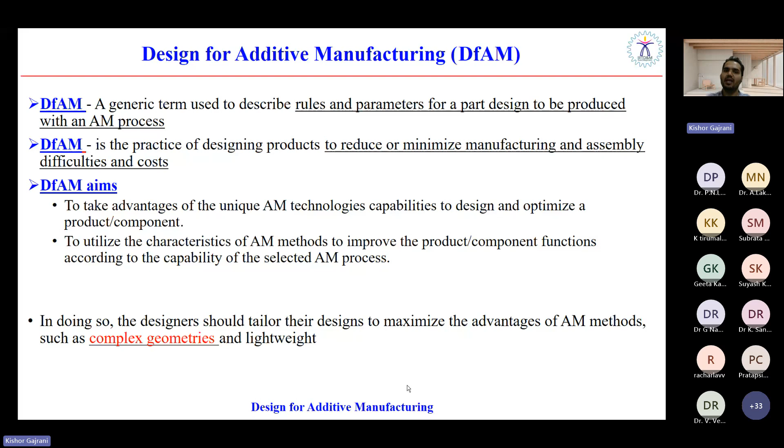So with this aim, we usually design a component. Whenever there is complex geometry, we need to design in an entirely different way. When we have a very simple, common solid object, we usually do not bother that much about the design. Now I would like to show you one specific object, and we will see how that object looks when designed conventionally versus when designed with the help of additive manufacturing. Let's start with an example.

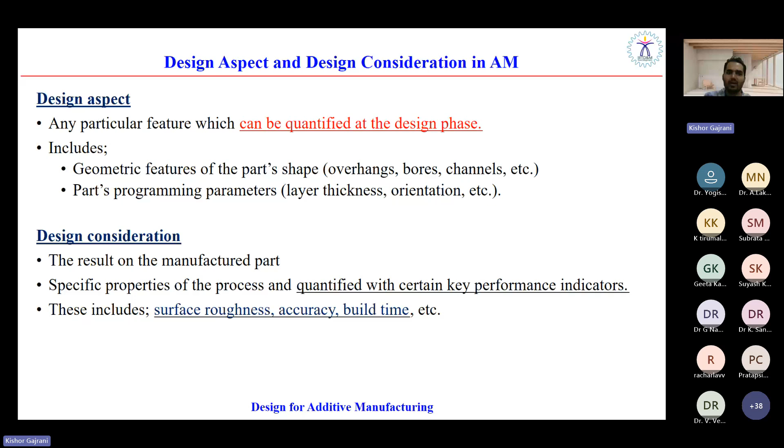Those will come under the category of design aspects and design consideration. Together, if you are taking care of both of these, we call it design for additive manufacturing. Now let's see what features come under design aspects, and what parameters come under design consideration.

Everything we have to think in terms of parts. Whatever part we are fabricating, based on that we think about design aspects and design consideration. For example, certain geometric features are quantifiable: overhang structures are quantifiable, bore or channel dimensions are quantifiable, and if we need a bridge kind of structure, whether one bridge, two bridges, three bridges, and what the dimension of the bridge should be—all those things are quantified.

What is the minimum wall thickness? What is the minimum feature size? I showed you this product earlier—if there's a hole of 2mm, or the smallest hole equals 2mm, I can say the minimum feature size is 2mm. Whether this product needs a support during fabrication, and if so, what kind of support, from which inclination, and what dimensions—all of these are quantifiable and come under geometric features under design aspects.

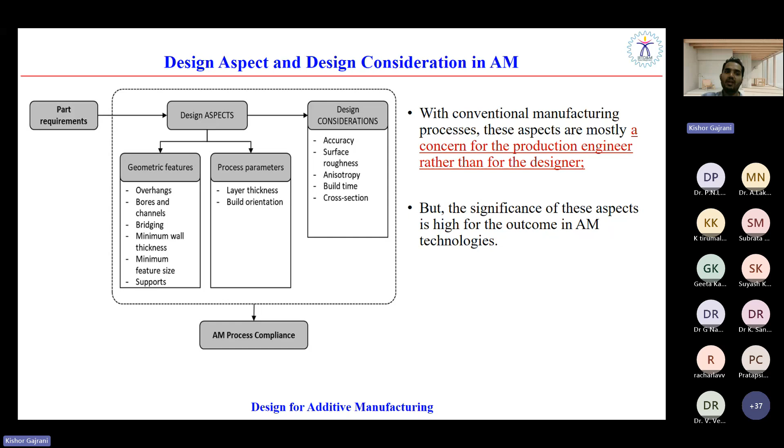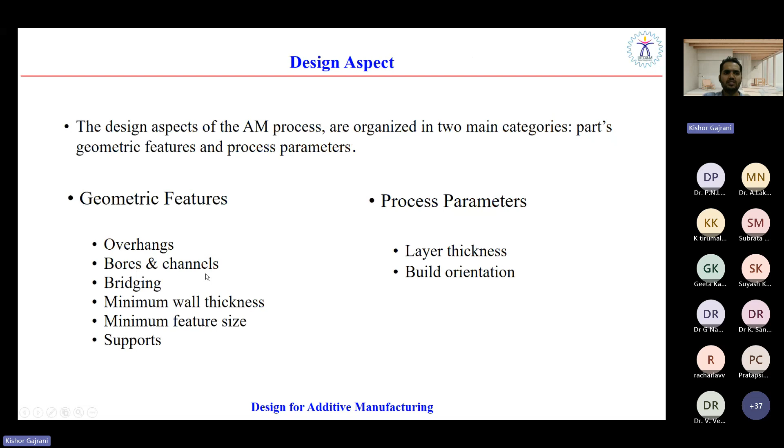Now let's discuss what we have to keep in mind if we have to design an overhang feature. I've put the same slide in the Word document, so I'll skip it here. Let's start with the geometric feature—there are multiple different geometric features, as I already mentioned.

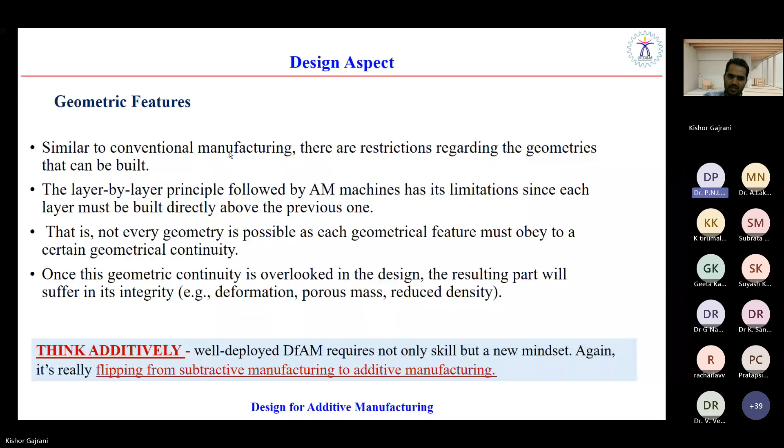Hello sir. Yes madam, maybe there is some technical issue. Sir has left the meeting. Okay, just a minute madam, I'm calling. Hello, now am I audible sir? Yes sir, yes sir, you're audible, thank you so much. Actually there was a lot of rain in this part of Chennai, that's why there was a network issue. Okay sir, no issue. Can anyone please tell me what was the last slide you have seen so that I can continue from that part? Yes sir. Now my slides are visible now.

When we discuss additive manufacturing, we categorize the design part in two ways: design aspect and design consideration. When we can quantify parameters that need to be taken care of during the design part, those come under design aspects—like we can quantify all the geometrical features of the product. For example, how much overhang is required, whether it's 10 degree, 5 degree, 20 degree; what will be the dimension for the bores or channels, the length, the depth—all those things we can quantify. What will be the thickness of the wall, we can quantify. In most cases, we also quantify the layer thickness. Whenever things are quantifiable and we can take care of them during the design phase, we call it a design aspect. But there are equally important things known as design consideration.

Even though we cannot directly quantify those things, we know certain things will affect key parameters like surface roughness. If our layer thickness is small, we get better surface roughness. If thickness is more, we get poorer surface finish. If scanning speed is slow, we get better surface roughness; if scanning speed is high, we get poorer surface roughness.

So even though we are not able to quantify directly, during the design we still know there is a relationship between multiple parameters. To get a product that's more accurate or has a better surface finish, we have to consider those parameters during the design phase.

Now let's see one by one the different design phases I'd like to show you, starting with geometric features. Whenever we build a product with conventional manufacturing, we follow certain design laws based on the failure criteria and the geometries we want to build. Similarly, with additive manufacturing, we have an entirely different set of design challenges. Depending on the type of machine you're using, the layer thickness or the minimum and best resolution of layer thickness changes, and the best resolution of minimum feature size also changes.

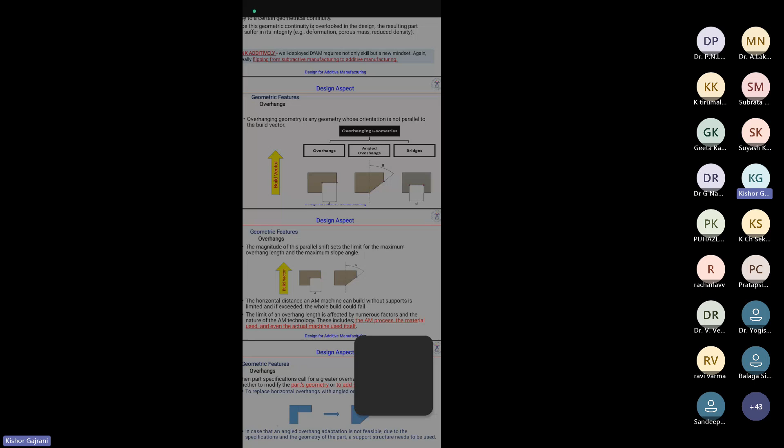And if you look at the bridges, there is a distance between two vertical components shown as D. Depending on the length of D, if it's very small compared to the vertical component, we can easily support it because the beam will act as a simply supported beam. But if D is too high, then we can expect an overhang, or buckling of the bridge, in which case we need to provide a support. So these are the important things we have to consider.

Now, what are the solutions if we have challenges like this? If you look at slide number 11, I am just zooming in on the slide.

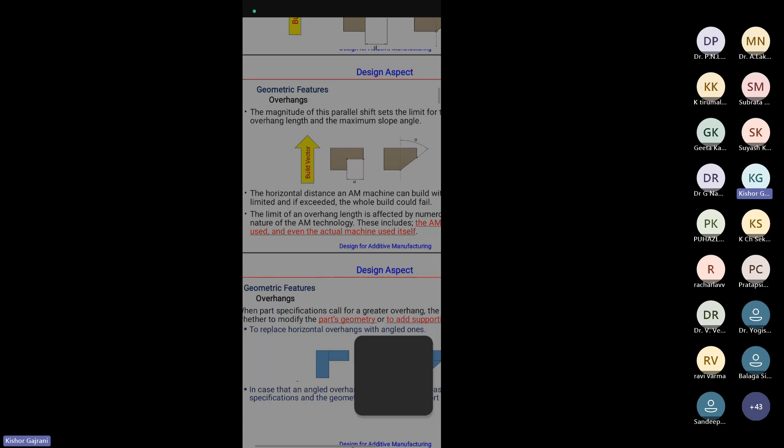If you will see, depending on the size of the parallel shift, we have to consider the limit. For example, with FDM, we can set a limit depending on the size of the vertical component, so that we can print up to 7mm of overhang without support. If we need to print more than 7mm, we definitely need a support structure, or otherwise we have to change the design so that our product should not fail.

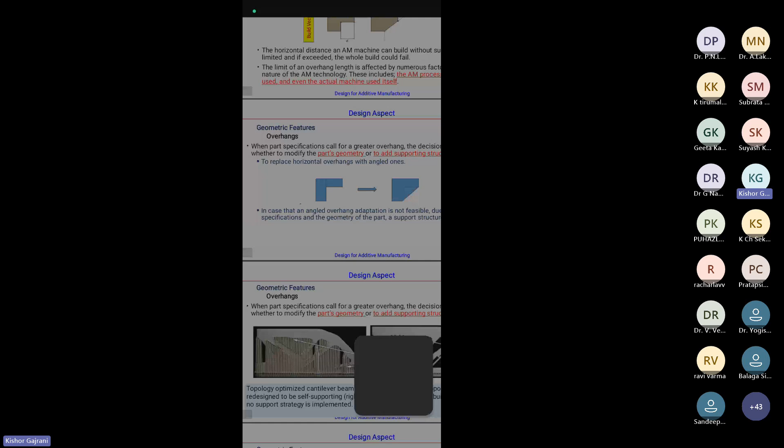So I am showing you another example of an added structure. Now we are on slide number 12. Same vertical component, on top it's a horizontal part. But because the horizontal overhang was too high, it is supported on the right side by a small triangular component. Even though the triangle component will be removed after printing, during printing you cannot print directly on air, so it is very important to avoid failure by providing this kind of support. Whether to provide this support or to allow printing with overhang is decided during the design phase.

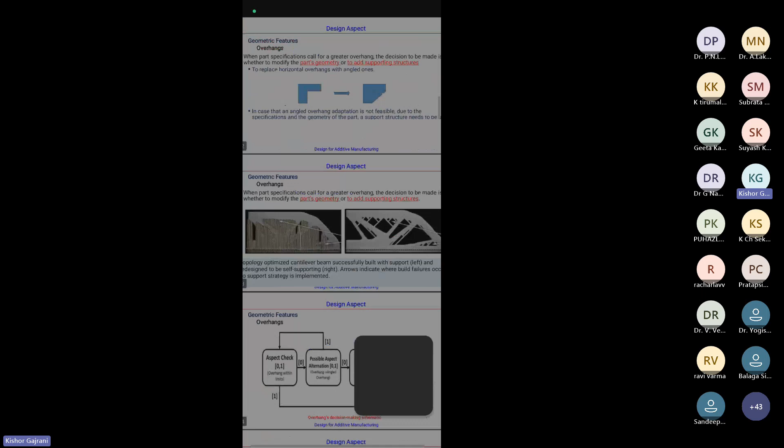Now if you will see the next slide, there's one specific example. On the left side, there are multiple small vertical lines in that component. This is a topology optimized beam. In this beam, just to print it and avoid failure, they have provided multiple different support structures. During testing, they found out where there is a possibility that this structure will fail, and you can see the arrow marks.

During post-processing, before using this component, we will remove all the support structures. These support structures are only to provide load bearing and printable space with additive manufacturing. So when this component is being used, they identified from which area it is failing, and they have put the arrow marks there.

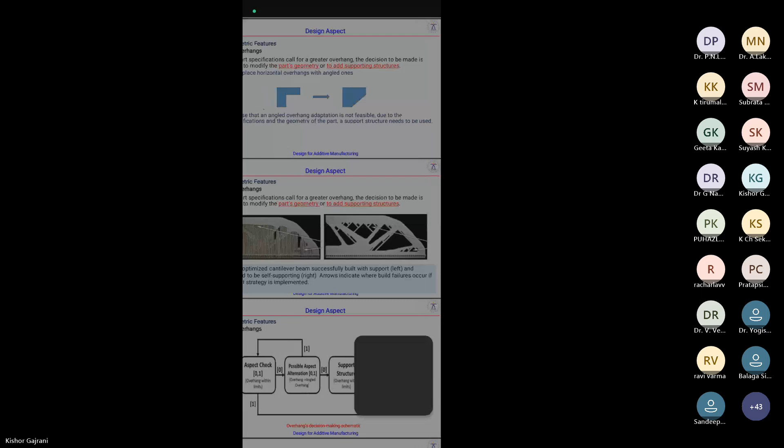During the next phase of design, they changed it. If you will see the second part, this similar kind of structure has higher load bearing. Zooming into this area, you can see the arrow. Previously this part was getting failed when the load was applied, but the same part is redesigned, and now there are multiple different solid layers. Because of this, the rigidity of the entire structure has increased.

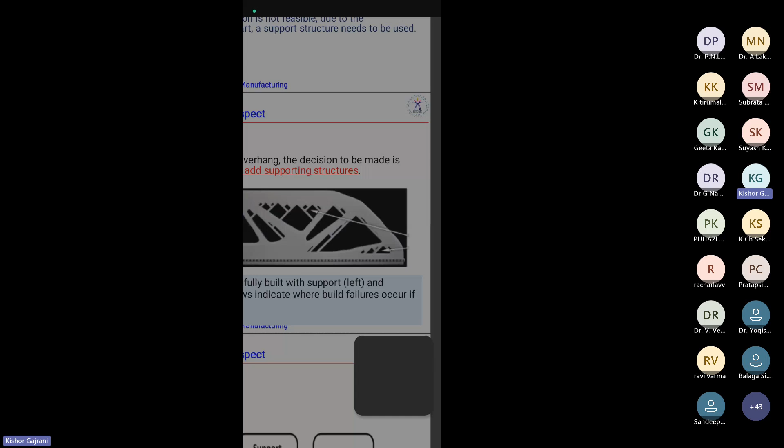Similarly, going back to the top part, the top arrow which has failed - on the right side they have redesigned it, and during the redesigning they have changed the entire type of design. That new design, because of the additional support, gives more rigidity that will help withstand the entire load of the component.

So this is one aspect of the design where we talk about overhang. Once the overhang has been designed, whatever overhang limit you have set is based on the printer. Let's say we have an FDM printer printing the material PLA. For a horizontal block of a given dimension, maybe 20 centimeters, based on that we can print a vertical block with overhang up to 7 centimeters.

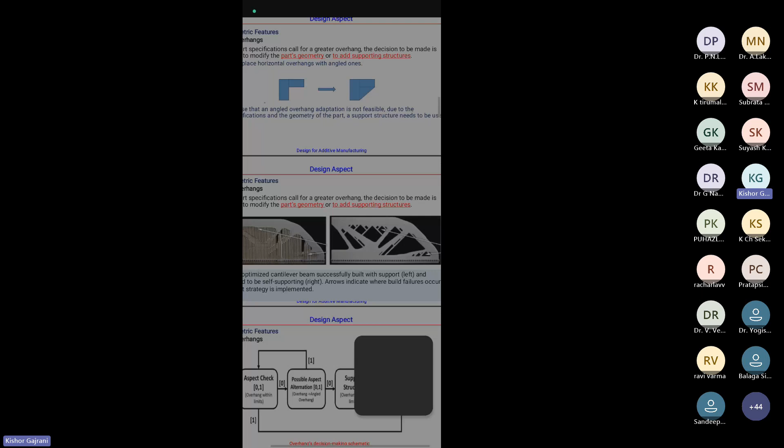Once we have designed that 7 centimeter overhang with the help of all the design aspects, we have to test whether that particular component is going to bear all the load or it will fail during loading, and whether the design needs change or the same design is passed. Depending on the size of the geometric features of the overhang, we check this aspect. If it's passed, we proceed directly. If not, we provide a possible alternative design, and this loop continues till we decide whether a support structure is needed, or we can directly go with the overhang and proceed.

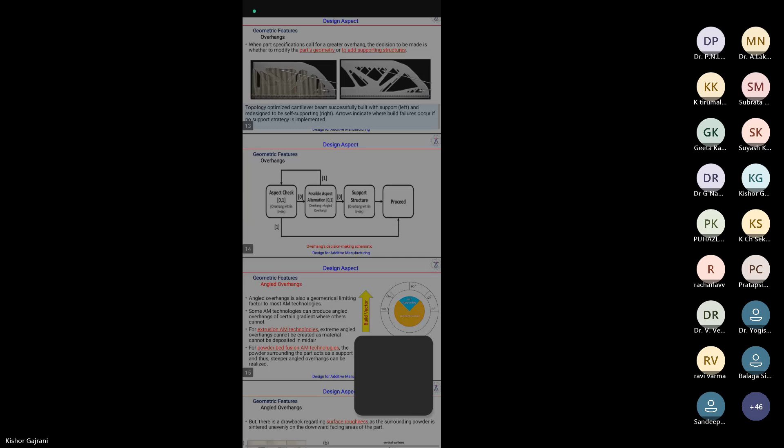So this was about our normal overhang structures. In some cases, we also have an angled overhang. We have initially seen 3 different kinds of overhang - the second one was the angle overhang. When we go with printing, particularly with angled overhang, plus 45 and minus 45 degree overhangs are comparatively easily possible in most extrusion-based additive manufacturing techniques.

Even in powder bed fusion additive technology, support structures are possible even with steeper angles. But if we have to move beyond plus 45 and minus 45 degrees, the situation becomes more tricky. Let me show you the next slide. If you see slide number 16, I'm zooming into that part.

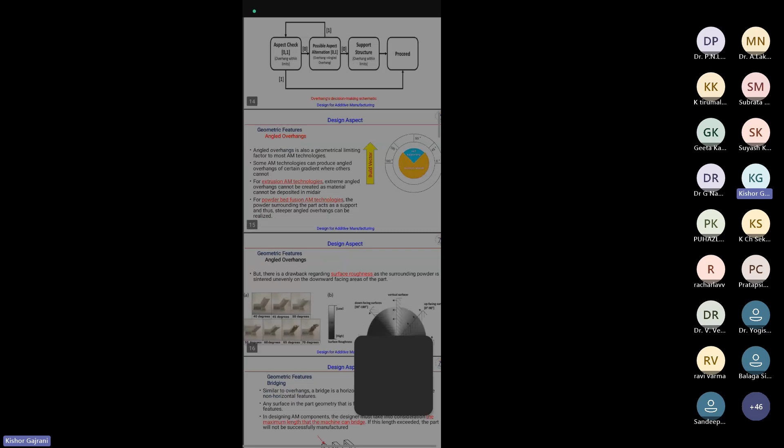To print this part, we have multiple different overhangs: 40 degree, 45 degree, 50 degree, 55 degree, up to 70 degree. As the angle increases, you have to see the back side of the overhang. To print the overhang, the material needs support from the back side of the powder in case of SLS technique. Whenever we use selective laser sintering or selective laser melting, the backside powder provides support to the top side where the laser source is heating it, and that backside powder also partially melts and attaches with the overhang.

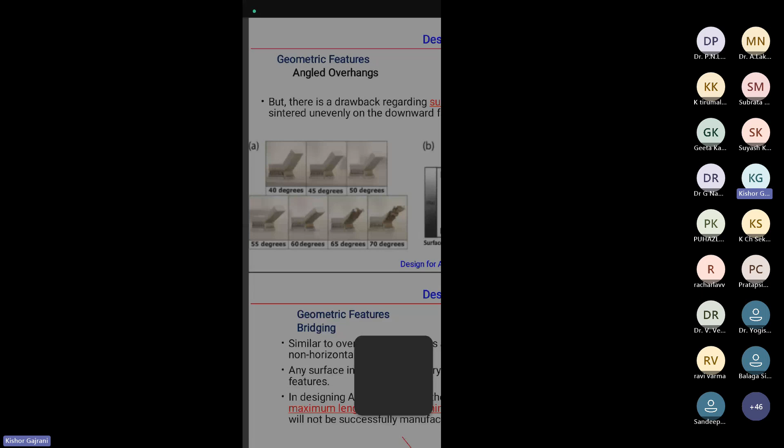When your overhang is beyond plus 45 degrees, the deformation, remelting, or half-melting of the powder increases, giving very bad surface roughness. So we have to find the limit based on the printer. For SLM, it's possible to print up to 70 degrees. But with FDM, plus 45 to minus 45 is possible without support structure. Beyond that, we have to use a support structure.

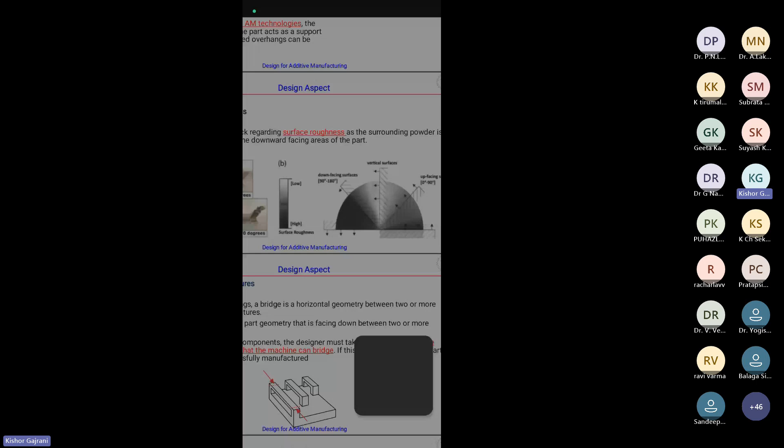Now let's discuss the next design feature, known as bridge or bridging. I'll show you this figure. We have a solid horizontal block, and on top, at both sides, we have a vertical block. Both vertical blocks are connected by the horizontal block. Now that horizontal block is only supported at the ends, not entirely supported from the center part.

Because it's not supported at the center, we need to determine how much of the length, marked in red, can be printed in air, or whose load can be borne by those vertical blocks. This depends not only on the material but also on the kind of machine and method being used. Depending on that, as a designer for additive manufacturing, we have to find the constraints. Based on that we can say yes, up to 10 mm is possible; beyond 10 mm we have to provide a support structure. Otherwise, this is not possible, particularly for this geometry.

Another way is to entirely rotate the printable structure. Instead of printing the horizontal block as is, we rotate the entire design by 90 degrees, then we can easily print this structure. But as soon as you rotate the block, the printing time will change, because the resolution and scanning speed in the Z direction in most machines is slower compared to the X direction.

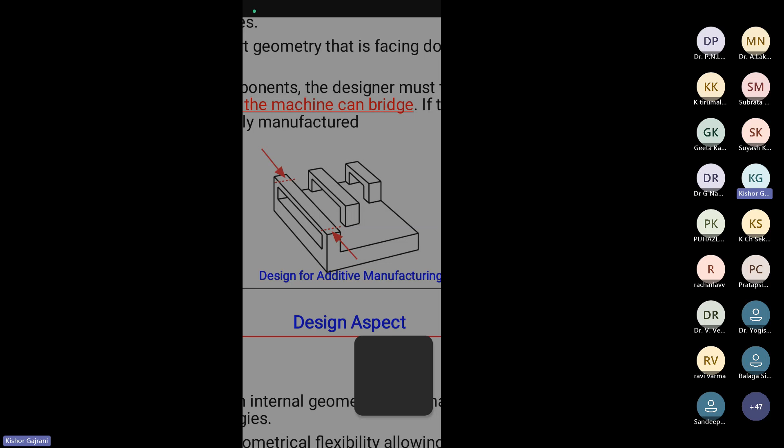So this is a tricky decision: whether to provide a support structure and go for post-processing and then cut it down - is that more economical or will it take more time - or whether just changing the orientation of the build will take less time and less money. As a designer, you have to decide based on time requirement, product quality, and final outcome, whether to print horizontally, rotate and print vertically, or provide a support structure. These kinds of decisions need to be taken by the designer.

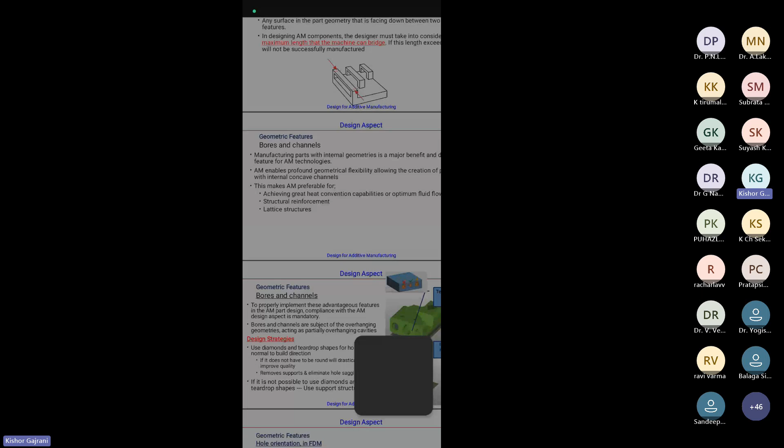Now let's see the next challenge of geometrical features known as bores and channels. Whenever there is a channel or hollow shape in any product, the load bearing capacity gets reduced. Also, because you are printing in the vertical direction, before you print the next layer, if there is a hollow part at the bottom, the top part will start moving down before solidifying itself, which deforms the structure. So it's quite challenging to make a bore or channel in additive manufacturing if the component is not designed properly.

Now, what are the possible solutions for that? I'm going to show you this particular figure. The channel needs to be built.

The shape of the channel was expected to be circular. But a circle has a curve, so it's always more challenging to make a perfect circle with additive manufacturing because of the limitation of the tool path or the layer thickness. So instead of an exact circle, a diamond kind of shape or teardrop shape is used - the center part is teardrop and the last part is a diamond shape.

If the same kind of work is possible with this kind of shape, then with additive manufacturing it's easier to print the teardrop shape as well as the diamond shape because they provide more support to the entire product compared to the circular one. And if it's not at all possible to use a circular one, then it is always suggested that you make a smaller dimension circle or channel, and later in post-processing you can do the boring operation and make the channel.

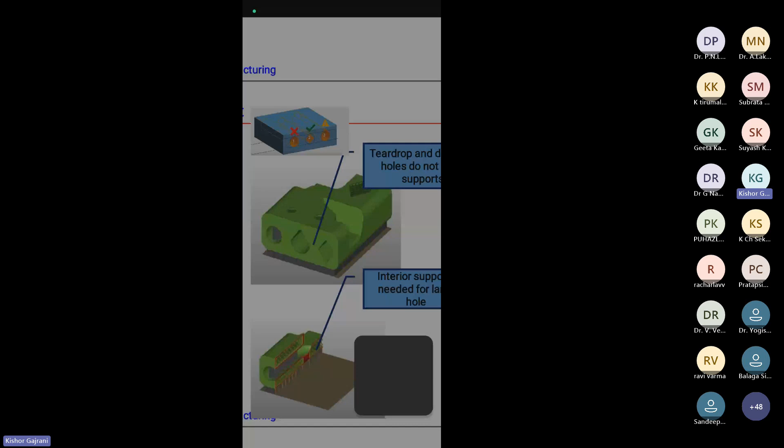So whether to go for post-processing or to just change the shape of the printable part depends on its application and limitations - as a designer we have to decide. This is about the boring and the channels.

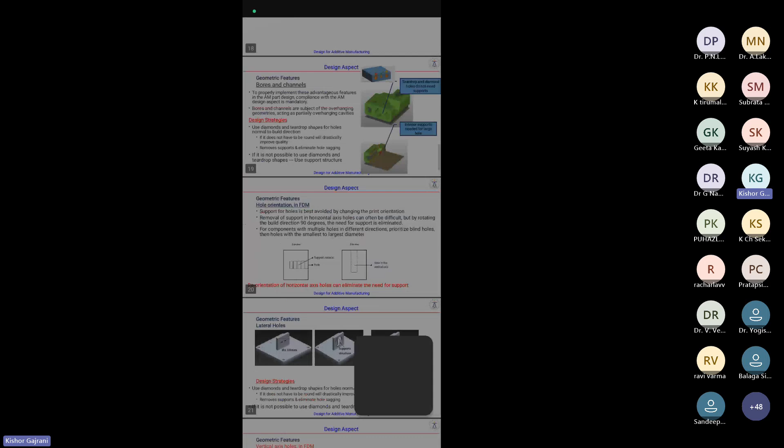The next aspect is the hollow structure. I am going to show you the left side. This is a U-shaped product. At horizontal we have one block, then from the last extreme left we have a vertical block, and again from the top we have a horizontal block, but in between we have a hole.

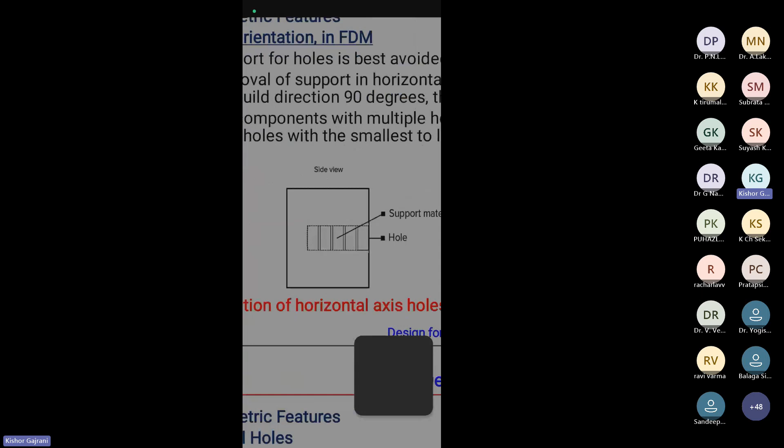Now if we have to print like this, we definitely have to provide support material in between if the overhang or bridge size is too much. So the solution for this is, if you don't want to waste material, instead of printing in this direction, you can just change the build direction.

You can see on the right side - it's the entire same product, you just change the orientation. By changing the orientation, now we can make a hole in the vertical axis. But while you are using the product, you can realign it in the horizontal axis. By doing this, what you have achieved is you have simply saved a lot of material which was used for supporting the overhang. Apart from that, you also save the post-processing time.

During that post-processing, you have to cut down the internal material. So these are the design aspects we have to think about very critically.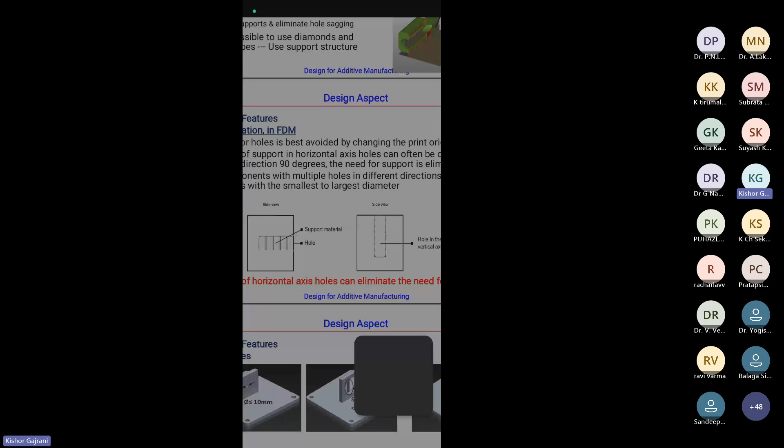Now let's see the next part, known as lateral holes. During design strategies, we have to find out what is the minimum possible size of hole that can be printed with the printer you are using. Not only that, what is the maximum size of hole we can print. If you look at the lateral hole, the first image shows a very crisp less than 10 mm diameter hole which can be printed very easily, not a problem.

But as soon as the size of the hole increases, the number of layers needed to print will increase multiple times. The deformation due to higher temperature and lack of support will increase multiple times too. So even if you want to print a circular hole, you will end up with an elliptical hole where the major axis and minor axis dimensions are different because of the deformation.

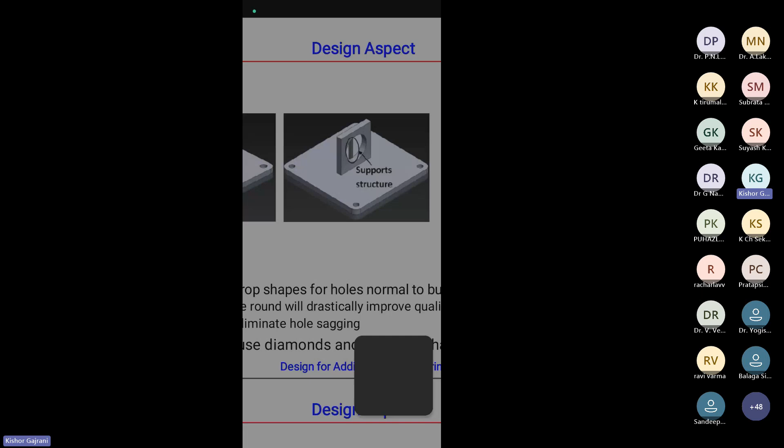Just to avoid that, we have to make sure we provide the support structure if the size of the hole is huge. Or if you are not willing to provide the support structure, then we have to find out whether the same application can be done by just changing the shape of the hole instead of it being entirely circular.

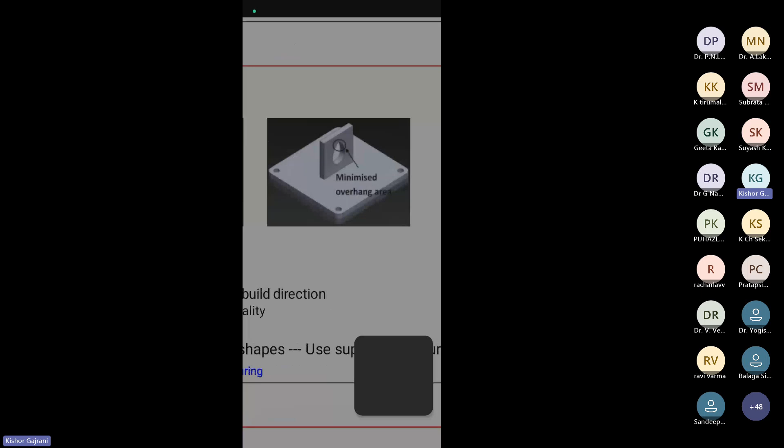If we can do it with a teardrop hole, you can see that by making the hole shape teardrop or diamond, we can minimize the overhang area. If we minimize the overhang area, we will have better support for the hole.

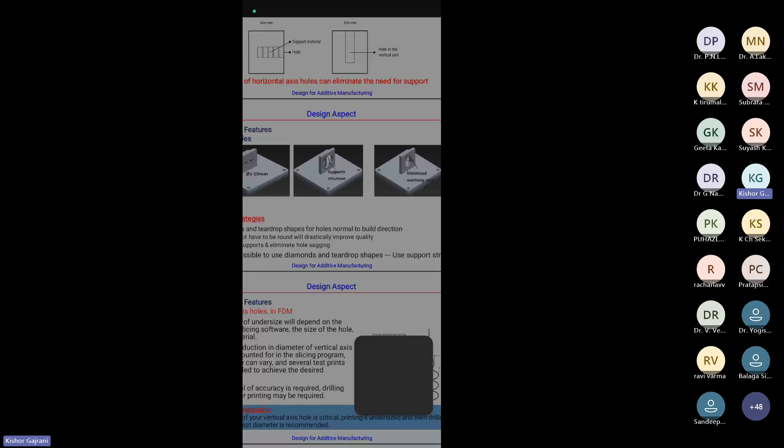So as a designer, all these things we have to consider - what is the size of the hole, what is the shape of the hole, whether support structure is required, if the same applications can be done with a different type of hole, how much time should be required, what should be the build orientation - all these things we have to consider under the design aspect. Now moving to the next part, this is also related to vertical holes in FDM.

I am showing you this slide. If you see the last part on the right side, with the slicer, when working with the software, our aim was to make a hole which looks like the top part. The slicer diameter is shown here. But once the hole is printed, because of the deformation in multiple layers, as well as the increase in load on the lower layers, instead of a perfect diameter, you end up with an elliptical type, shown in the second and third part.

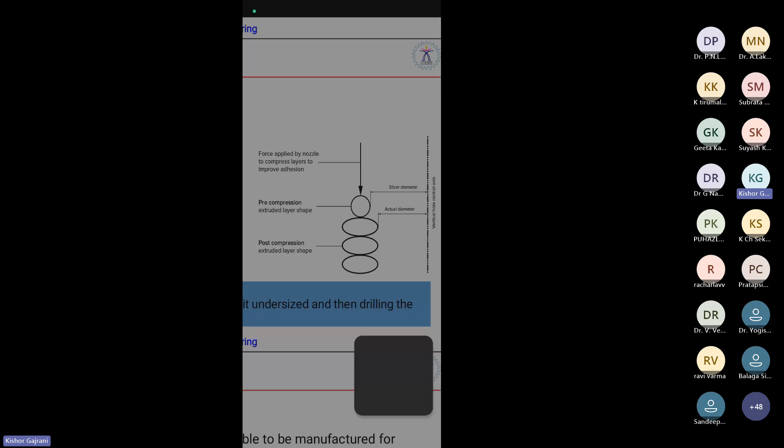So the actual diameter will be slightly different, and post compression, again the extruded layer will be slightly different, which is not acceptable. So when you have a bigger hole and cannot change its shape, there are only two options: either provide a support structure, or, if you believe the support structure will be more time-consuming or costly to remove, simply reduce the size of the hole during printing and after printing enlarge it by drilling. These are the kinds of decisions we have to take whenever we design for additive manufacturing.

Now let's move ahead.

Apart from holes, another feature we discuss during printing is wall thickness. The minimum wall thickness we can print depends on the resolution of your material and component. Apart from resolution, it also depends on the focal length of the laser, if it's a laser source, or if you're going with FDM, the size of the wire you're using, the melting temperature, or the nozzle orifice.

So depending on multiple things, minimum wall thickness is decided. I will show you once again. If you see the left image and the right image, even though the minimum wall thickness is assumed to be 1 mm, if you want to print this 20 by 20 block with 1 mm thickness, it's highly unlikely that it will be able to withstand the load.

So a lot of stress analysis needs to be done before printing the product, and it is recommended to have a minimum wall thickness, particularly in the case of a 20 by 20 block, of 3 mm. This 3 mm is not randomly calculated. It is based on the stresses developed on the entire structure during printing as well as after printing. During printing there will be a lot of residual stresses and deformation, but after printing as well, whenever we use this component, there will be some residual stresses stored in it, plus the weight of the entire component is acting even after printing.

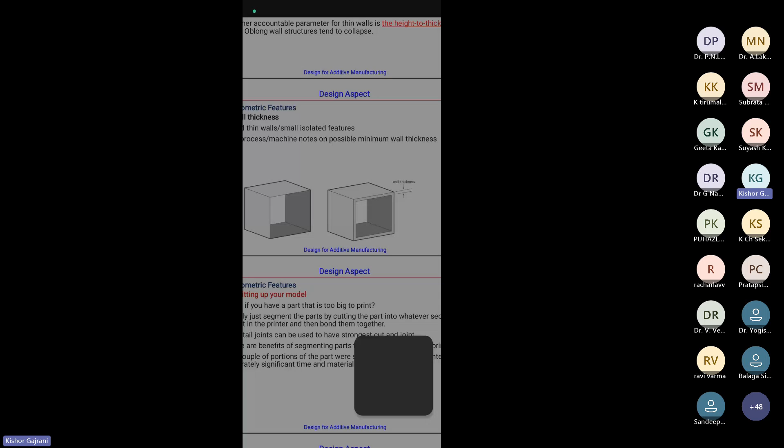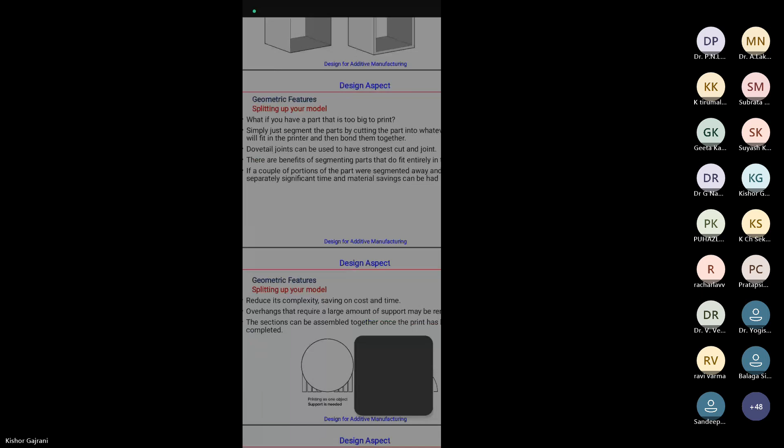Now, there are certain geometrical features which seem quite difficult to print, but if you simply divide those features into two parts and later assemble them, that's also possible. This is known as splitting up your model. Let me show you this image.

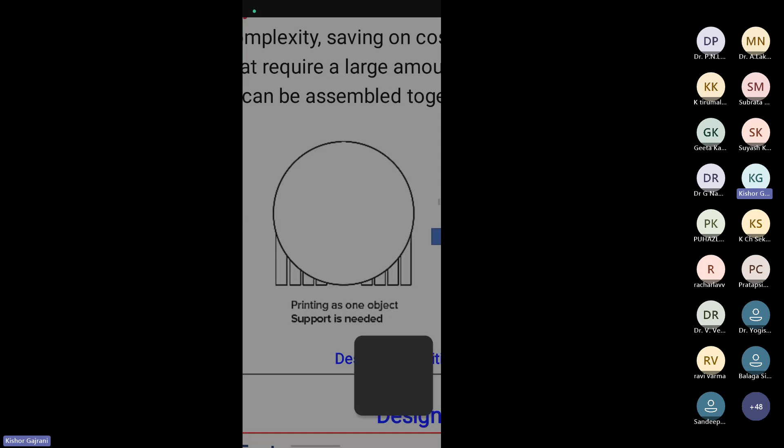If we want to print a sphere of 20 centimeter diameter, we need to provide a lot of support from the backside in the vertical direction to maintain the circularity of the sphere. Now what is the possible solution if you do not want to use support? Instead of using support, you can simply print two half semi-spheres. At the center you will always have support because it's the biggest dimension, the diameter at the center. So you print two different hemispheres and later assemble them together.

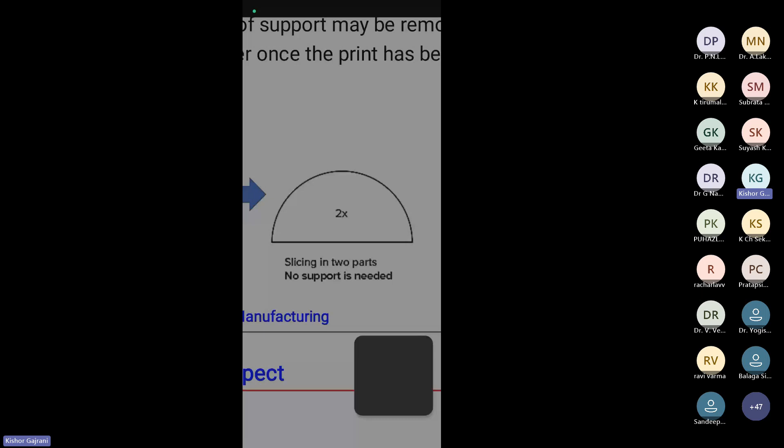So that is also possible. In some cases these kinds of solutions are readily available; in other cases we have to think out of the box to get to the solution whenever we design for additive manufacturing. Now moving ahead, there are certain components which need different kinds of solutions.

Now I will show you one example. This is an example of adding hardware or inserts. If you see this image, they are printing a turbine. That turbine is usually subjected to very high temperature. To cool that turbine, we need to provide a material which has very high thermal conductivity, which can dissipate a good amount of heat in a short time.

So during the printing itself, what they did was print half of the wheel, and on top of it — let me zoom in — you can see they have kept copper inserts.

Now the good thing about copper is it has very high thermal conductivity. So whenever during the usage higher temperatures develop, because copper has higher thermal conductivity, it can dissipate the heat faster as compared to normal steel.

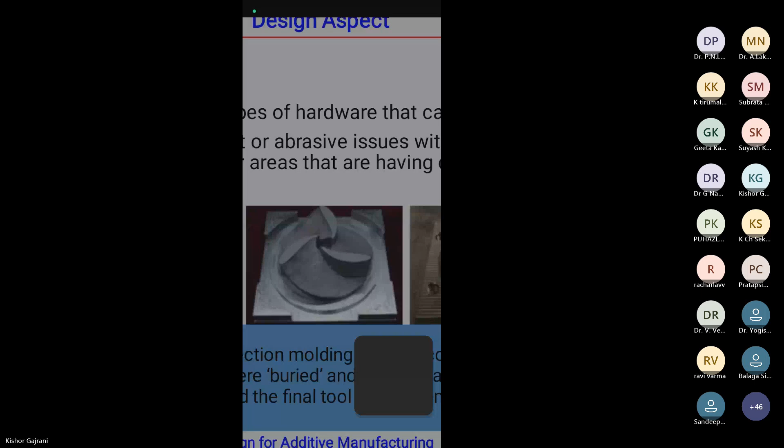So they have kept it at the center, and on top of it, they have started printing. In this particular blade, there is already a copper insert, but this can only be done if you have designed for placing the copper insert halfway, given it a break, put in an insert, and then started printing once again. So this is another aspect of design.

Now there is a very challenging thing: printing the threads. A lot of components, because of assembly, need threads. But if you are printing a component made of PLA, and also making the threads out of PLA, what will happen? Only because of the thread, the life of the component will get reduced. Since PLA is a polymer, if you apply load and insert a steel screw into that PLA component, then because of screwing and unscrewing multiple times, the threads in the PLA will wear out.

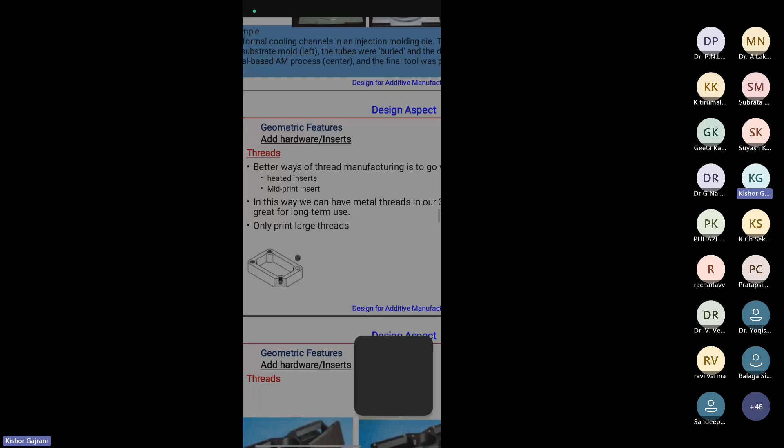So to provide a solution, what they did was print the entire component with PLA, but only wherever threads are required, they provided threaded steel parts. Let me show you. Just by changing this small thing, wherever assembly has to be done, they have increased the life of the entire print or product.

So these are the kind of aspects I am talking about. Design aspects are very much important, and we have to take care of each and everything depending on the type of product we are printing.

Now moving to the last two parts of the design aspects: one is process parameter, another is layer thickness. The process parameter is something we have to crucially select before printing, depending on the priority. You can select a very fast processing parameter, meaning fast scanning speed and higher layer thickness, if you want to save time required for printing the product. If time is the priority, you can go that way. But if you want really good surface roughness, dimensional accuracy, or better tolerances, you have to use a different set of process parameters.

Layer thickness is also very important for the quality of the print. If you have very small layer thickness, it gives better surface roughness. If your layer thickness is high, it saves time, but the surface finish and tolerances get sacrificed, plus your dimensional accuracy is also sacrificed. There are certain products where you can combine these two. Let me show you an example.

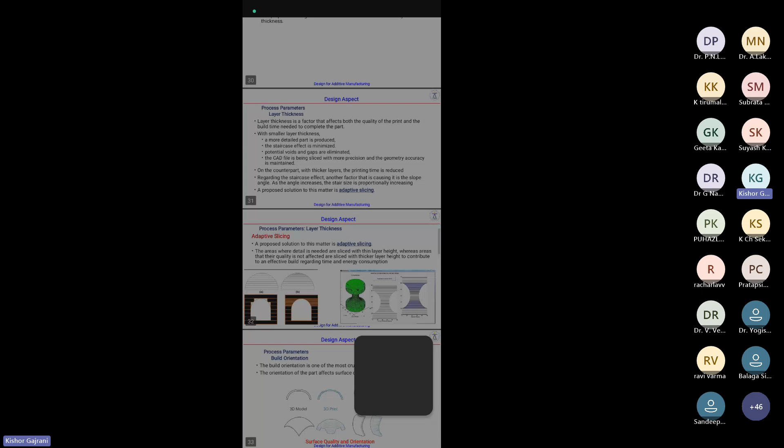Let's move ahead and look at this example. If you have to make an arc like this and want a perfect arc, but your layer thickness is big, you will not be able to get the perfect arc - you will end up with horizontal blocks. But what you can do is use adaptive slicing. This means for features where curvature is not there, you can use higher layer thickness, and for features where we have curvature, we can go with smaller layer thickness.

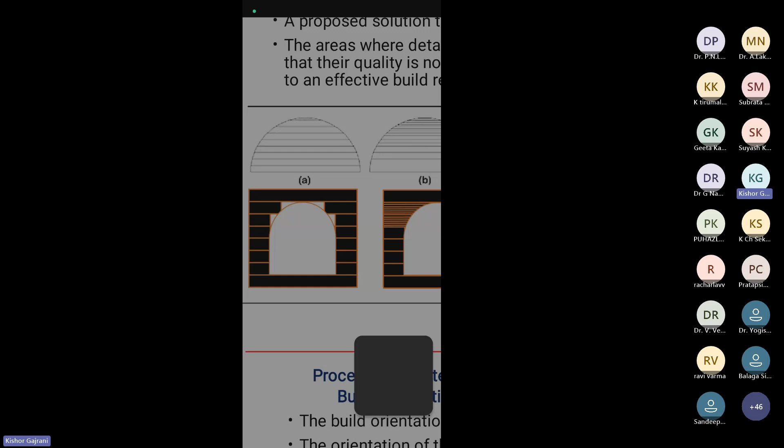So you can see this part B: at the bottom side, the layer thickness is high, but as soon as the arc or curvature comes, the layer thickness reduces. With this, you can get a better curvature, and not only that, you get a better surface finish. The only trade-off is you need more time. So as a designer, depending on the product, the capability of the equipment, and the method you are using, we have to decide whether to go for one side or the other.

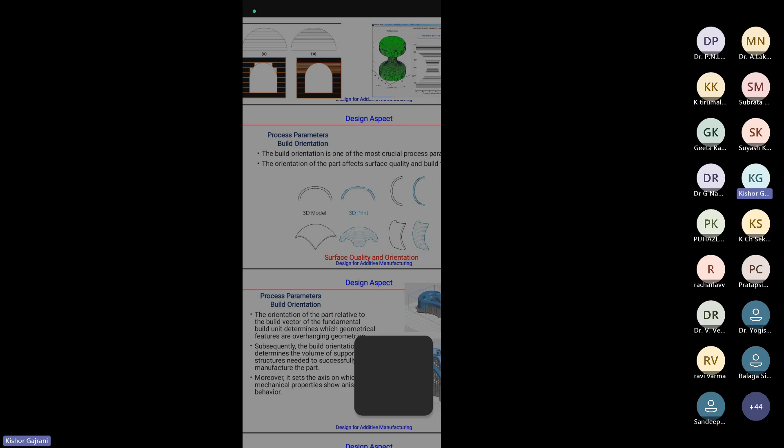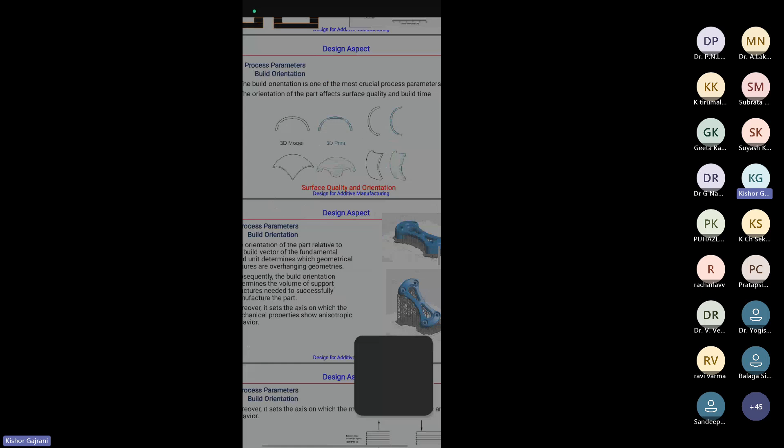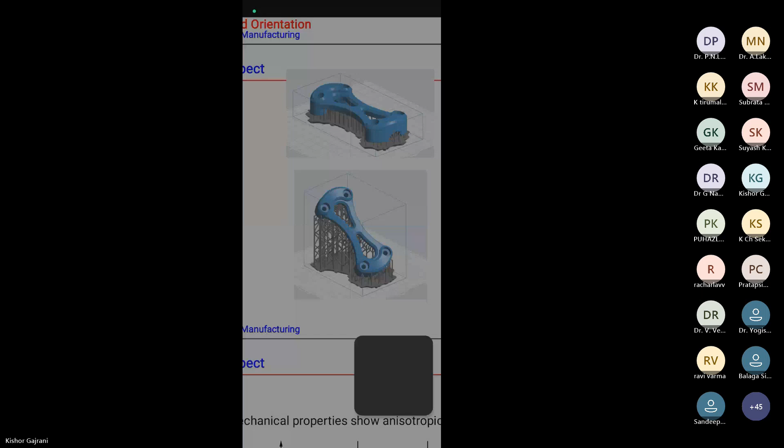So there are a few examples. If you will see here a 3D model, the curvature is given. You can build this curvature keeping at the horizontal direction, or you can build the entirely same thing keeping at the vertical direction. If you will see the next component, horizontally also you can build like this, and also you can build this at 45 degree. There are two things to consider. Whenever you build at 45 degree or a different orientation, you have to provide more support, so more amount of material will be wastage. But whether that more amount of wastage of material can be compensated by better properties which are required by the product for any specific application, those kinds of questions designers have to answer.

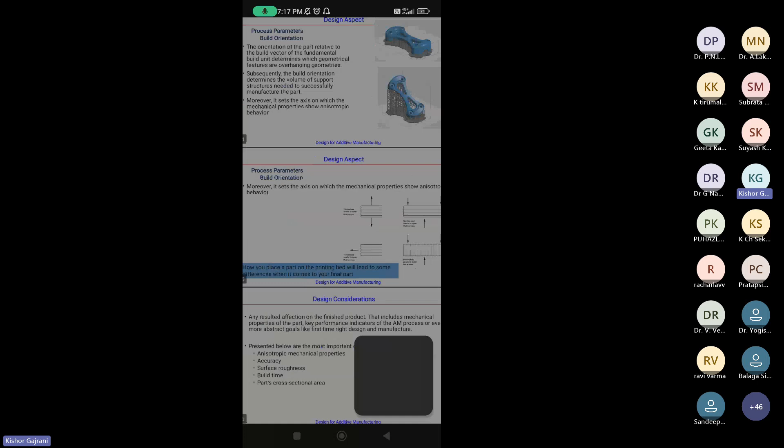Now I will move forward slightly faster because I have already wasted some time during the internet connectivity. So what are the main effects of the build orientation? Let's say we have built a product which is 0 degree in orientation or which is 90 degree in orientation.

If you will see this particular figure, if we have built layer by layer in 0 degree orientation and then we are applying the tensile load, what will happen? The product is going to fail prematurely because the joints will fail faster.

But the exact same product, if you apply a bending load, 3-point bending load, the product will behave as a very strong component. Now this exact same 3-point bending load, if you apply it when the product is built in a vertical orientation or 90 degree orientation, the part will be weak, because wherever you have the joint between the multiple layers, if you apply the load at that joint, because of the failure in the joint, your product will fail.

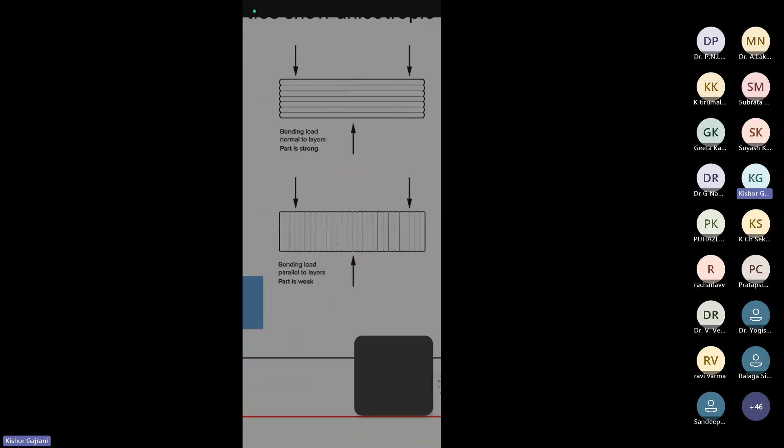That's why, depending on the type of application for which you want to use this kind of product, we have to first think which kind of load will come, whether it will be a tensile load, a compressive load, or a shear load. Depending on that, we also have to decide what kind of geometry or what kind of build orientation we have to choose. That's also a very important point.

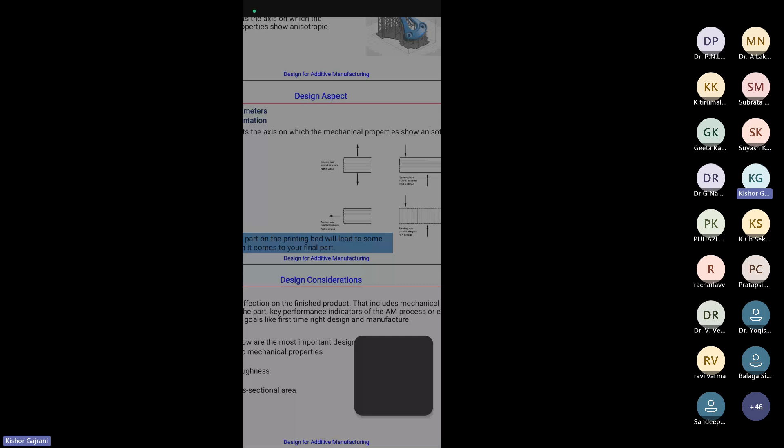Now we have completed all the design aspects of additive manufacturing. Initially, if you remember, we divided the entire part into design aspects and design considerations. Till now, whatever we have discussed, all those things are quantifiable during the design phase itself. Now we will discuss the design considerations which are not quantifiable during the design phase, but there are a lot of parameters which are going to affect the final product if we have not considered them. Let's see what those effects are.

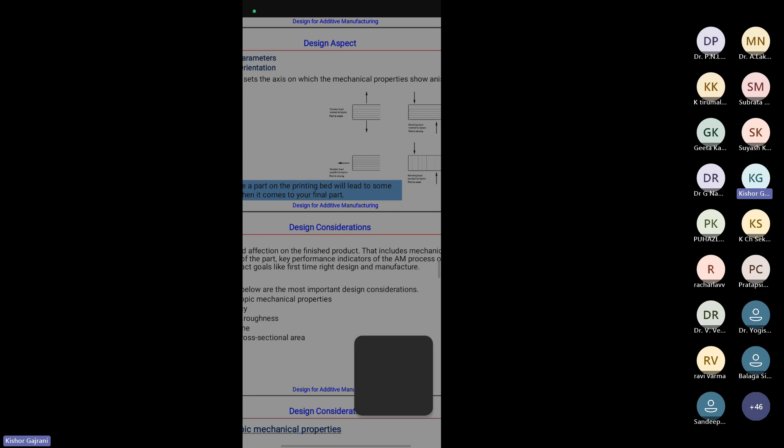Starting with one of the most important things: anisotropic nature. Additive manufacturing is not isotropic, meaning it is not able to make a component which is isotropic. First, we have to understand the difference between isotropic and anisotropic components. Isotropic is something which will show you similar properties in all directions, whether you are applying a tensile load, a compressive load, or a shearing load. Anisotropic are those kinds of components or materials which will show different properties in different directions. So additive manufacturing will fabricate a component which will always be anisotropic in nature, meaning in different directions you will have different properties.

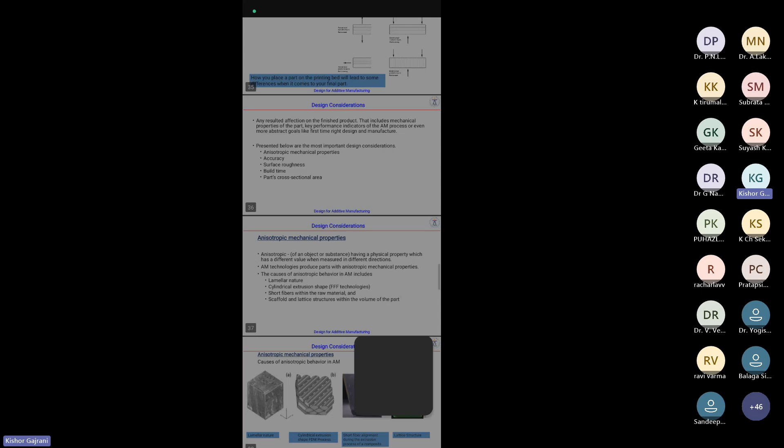So I will show you 4 different examples. If you are using a laminate sheet metal method to fabricate the component, because of the lamellar nature, there will be multiple different layers of the sheet.

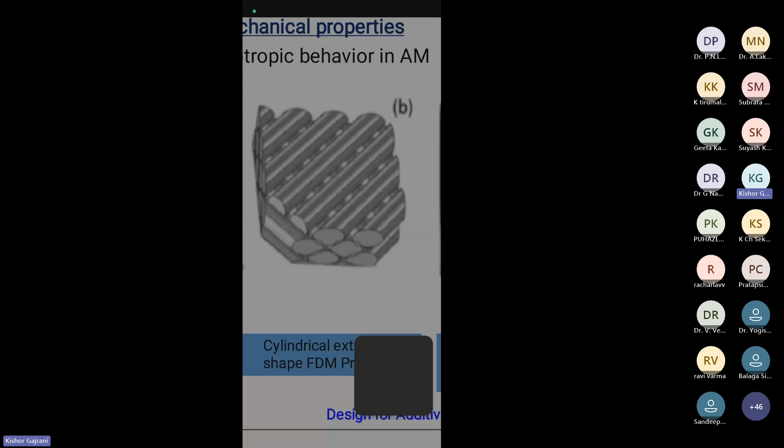In vertical direction, your properties will be different. In the horizontal direction, you will have lesser strength because of its lamellar nature. That will make the component anisotropic. If our build direction is 45 degrees in one layer and minus 45 degrees in the second layer, every layer will have different properties. This is possible in case of FDM kind of printer.

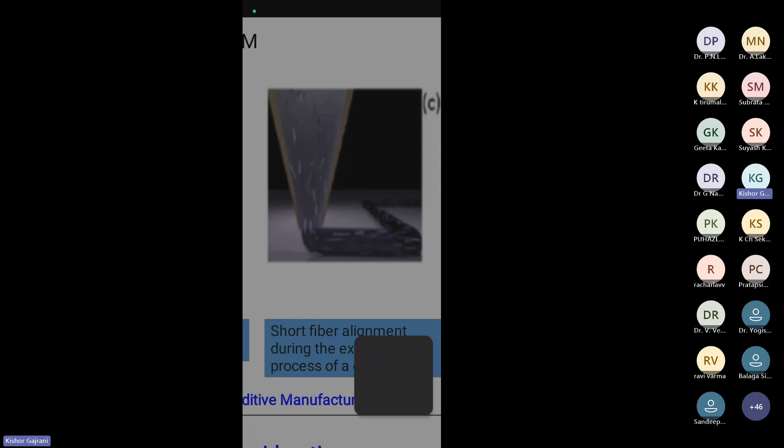Now if you see the third kind of printer, which usually has multiple different fibers in the matrix itself when printing the composite, depending on the alignment of the short fibers filled inside the resin during printing, properties are going to change in different directions, because the alignment will be in one direction or the other. So depending on the direction of the fibers, properties change, and these are anisotropic in nature.

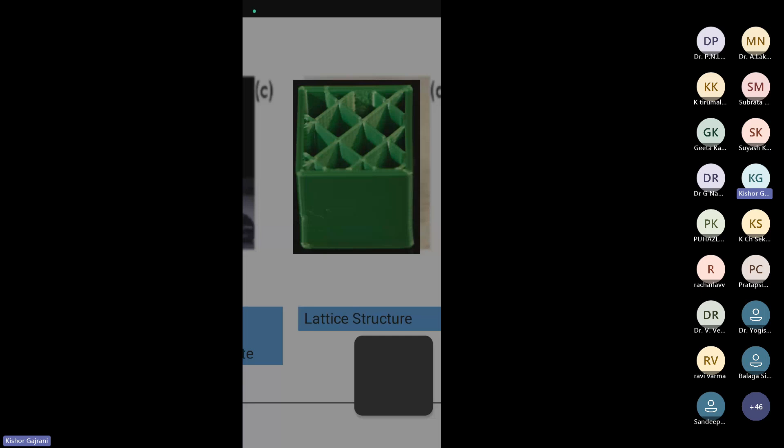Additive manufacturing is also very well known for printing different kinds of lattice structures. These can be auxetic in nature or normal lattice structures. In both cases, depending on the type of lattice, the properties in different directions will change. That's why we have to think about the applications and understand particularly what is the requirement of the product we are printing. Based on that requirement, we have to decide which kind of lattice structure, or what kind of build orientation, or what kind of thickness to print. So this is about the anisotropic behavior of the material.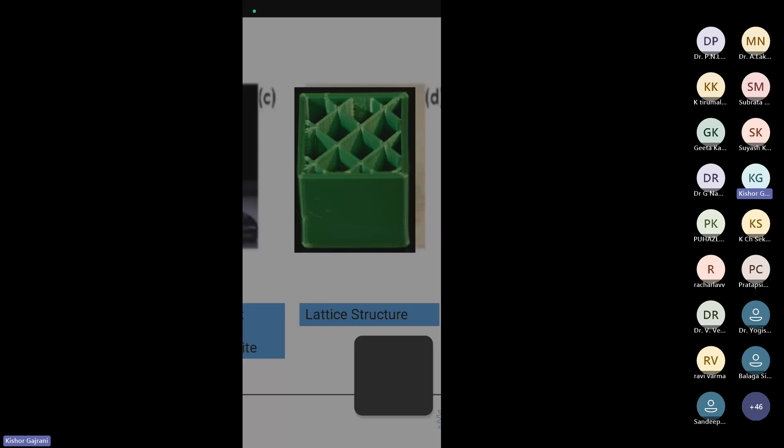Now I will show you one more design consideration aspect closely related to anisotropy. Let's say you want to print this kind of metallic component, and we have an option either to print in the horizontal direction at 0 degree build orientation, or to build in the vertical direction at 90 degree print direction.

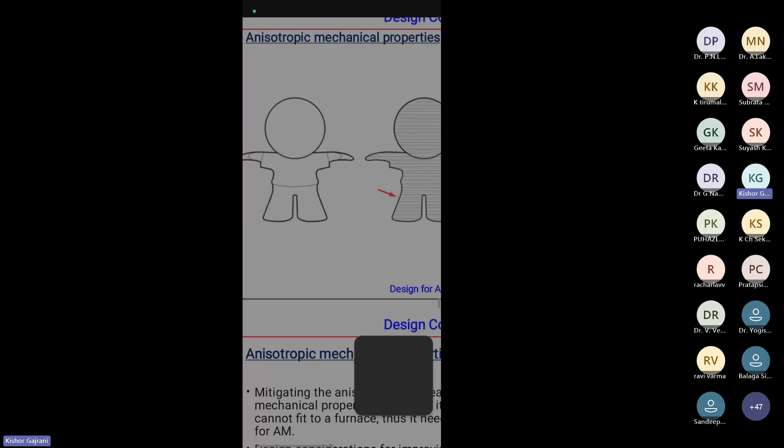You will see this particular component, because it is printed with 0 degree build direction, particularly near the joining at the leg, will be slightly weaker. Why will it be weaker? Because at the center there is a gap, and then more load is being transferred in both the legs.

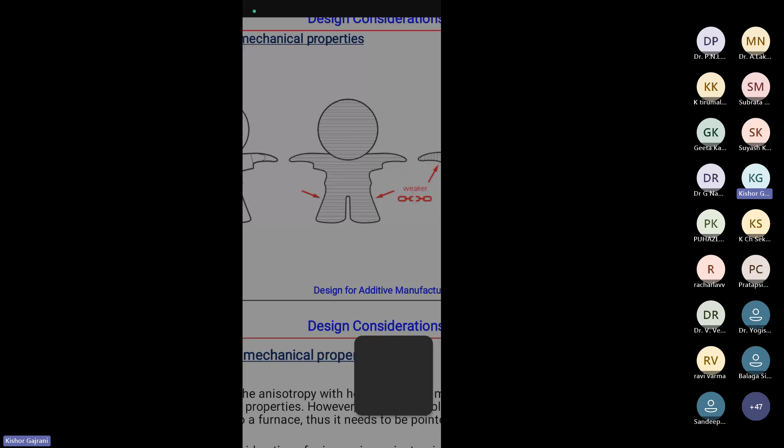If you print the entire same product in the vertical direction, I will show you, the last corner part will be slightly weaker. Because the geometry is continuously changing from top to bottom with slight change in build orientation, the load bearing capacity at different parts of the same component is going to be different, and that also depends on the build direction.

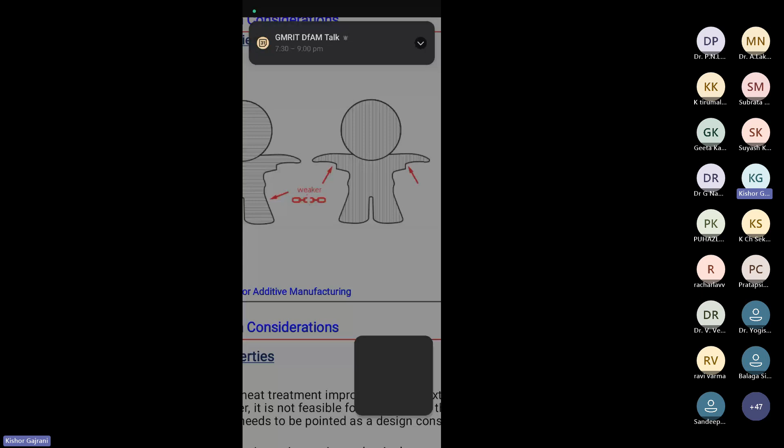So if there are certain places which are very important, if you know for which kind of applications you are going to use this component, you can decide whether to print in 0 degree build orientation or with 90 degree build orientation. Some examples will also suggest what I am going to show you.

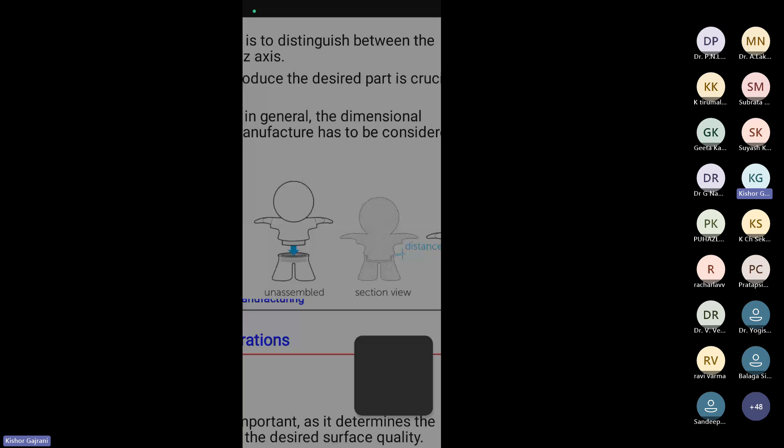You can print the bottom part with plus 45 and the top part with minus 45, to increase the overall load bearing capacity, not only in the horizontal direction from one side, but also in the vertical direction on the other side. So the bottom part of the component is built with one orientation, the top part with a different build orientation, and later you can assemble this component so that both weaknesses can be sorted out, instead of printing only with 0 degree and 90 degree.

So these kinds of questions, as a designer for additive manufacturing, we have to consider.

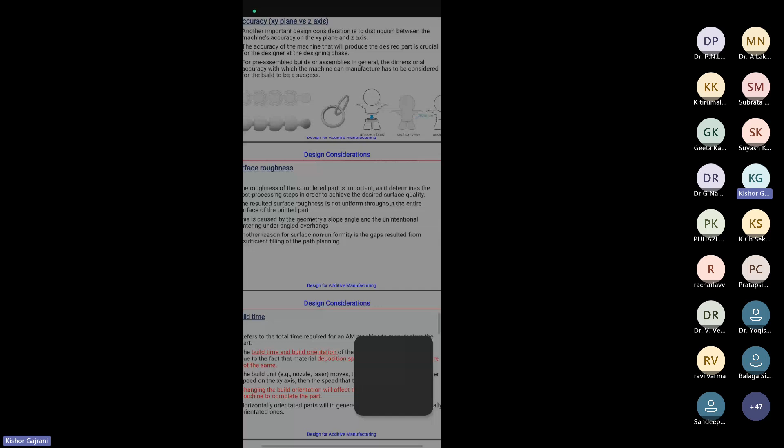Now depending on the layer surface, depending on the thickness of the layer which you are allowed to print, minimum thickness or maximum thickness, your surface roughness of the component will change.

Since additive manufacturing is layer by layer printing, if you have to print a component of 40 millimeters and each layer is 2 millimeters, you will print at least 20 layers. Depending on the curvature shape of those 20 layers, you will have different peaks and valleys at the corners, and the surface roughness will be entirely changed.

Instead of 2 mm, if you change the layer thickness to 4 mm, you only need to print 10 layers instead of 20, but those 10 layers will have bigger peaks and valleys, so surface roughness again gets changed.

So surface roughness depends not only on layer size, but also on scanning speed, printer resolution, and the material you are using—everything dictates surface roughness. Also, the layer thickness dictates build time, whether the component is built in 10 minutes or 20 minutes.

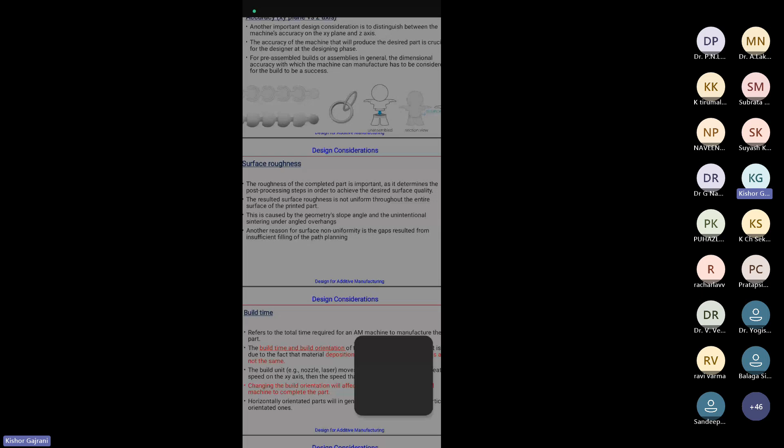It depends on what parameters and slicing strategy you use, whether all the layer thicknesses are the same, or whether you have chosen a bigger or smaller layer thickness. These things are very important to consider.

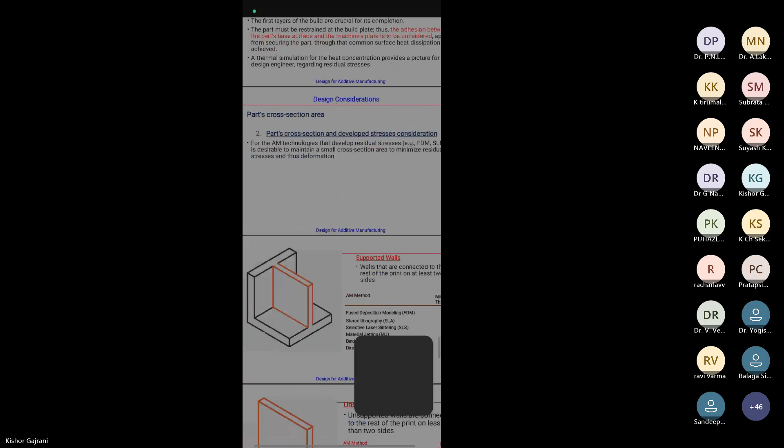Apart from that, we have to discuss the cross-sectional area of the parts. Let me show you an example. In certain cases, products are built on a base, and that base becomes part of the product. Specifically in metal printing, there is a base, and on top of it we usually print the product.

So there are two options: either we cut down the product with wire EDM and remove the base, or in some cases the base also becomes part of the product. Many times product failure happens when there is a mismatch between the base property and the printed part property.

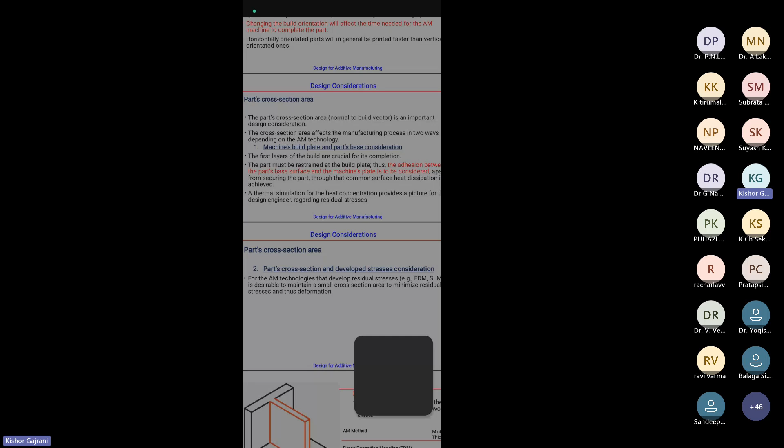This mismatch happens because there was no preheating done on the base. As soon as you print the first layer of material, a tremendous amount of heat is generated, and that heat passes through the base itself, affecting adhesion between different layers of material and between the part and the base. So it's very important to preheat the base before starting the printing.

So this was all about the design aspects and considerations for additive manufacturing. Before designing the product, we have to take care of a lot of things. In conventional manufacturing, the designer has a limited scope, but in additive manufacturing, the designer has a lot more to do compared to the manufacturer.

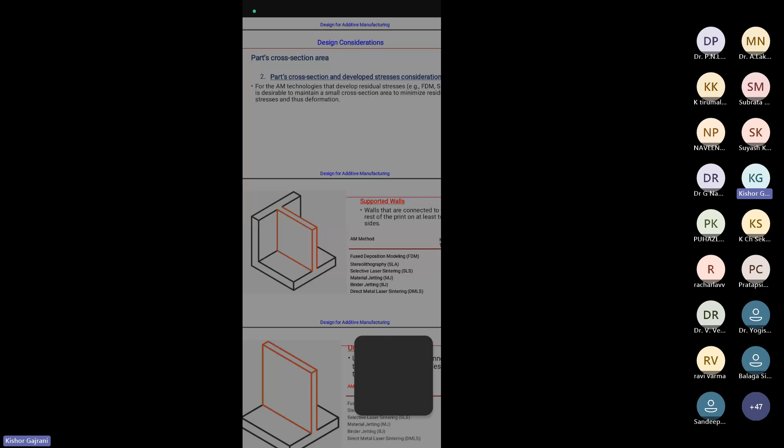Now let me scroll through some values. If you want to print a supported wall with two different walls, different methods have different minimum thickness. With FDM, 0.8 mm is possible as minimum thickness. With SLA, 0.5 mm is possible. But with binder jetting, even with the best printers, minimum thickness is 2 mm. So it's not only about geometry, it's also about the method you are going to use.

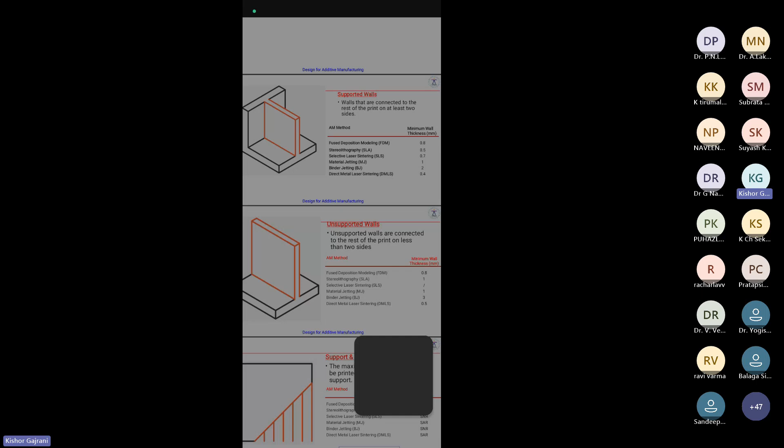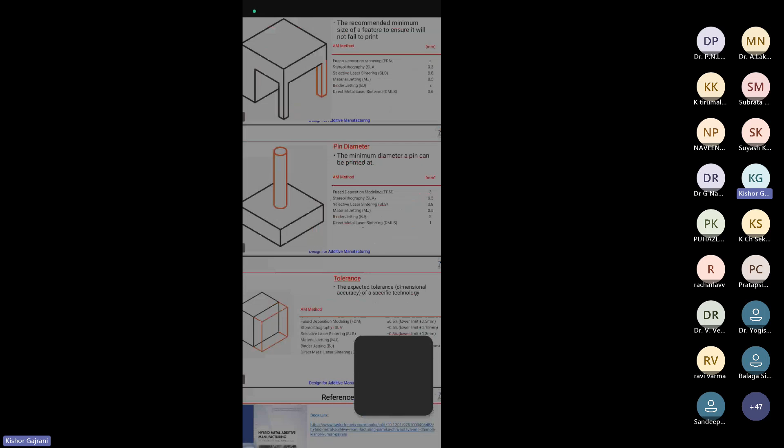I have a lot of slides similar to that showing data on what is the minimum feature, maximum feature, pin diameter possible, and tolerances possible based on the entire product. All this information is provided in a book published by our group called Hybrid Metal Additive Manufacturing.